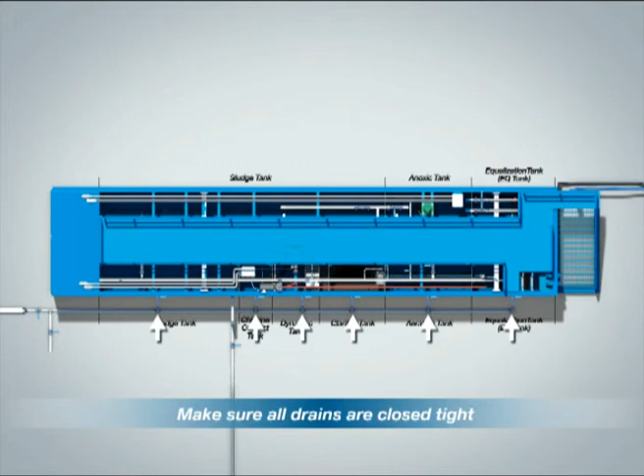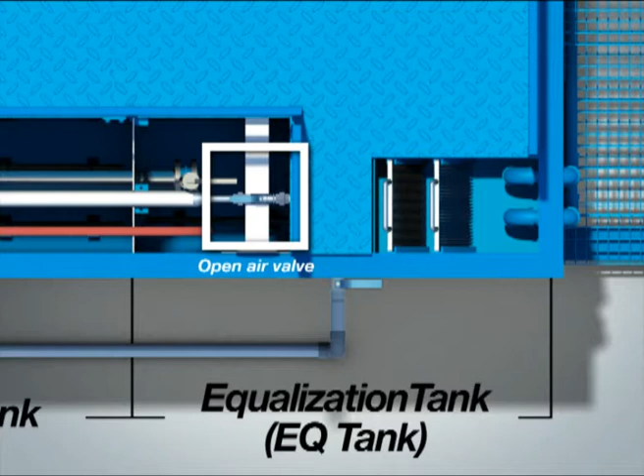Make sure all drains are closed tight. Open the EQ pump discharge valves completely. Open the air valves to the Equalization, anoxic, and aeration tanks. All other air valves should be closed.

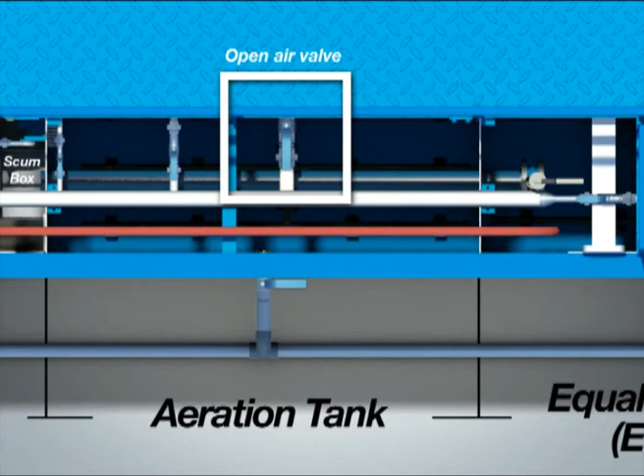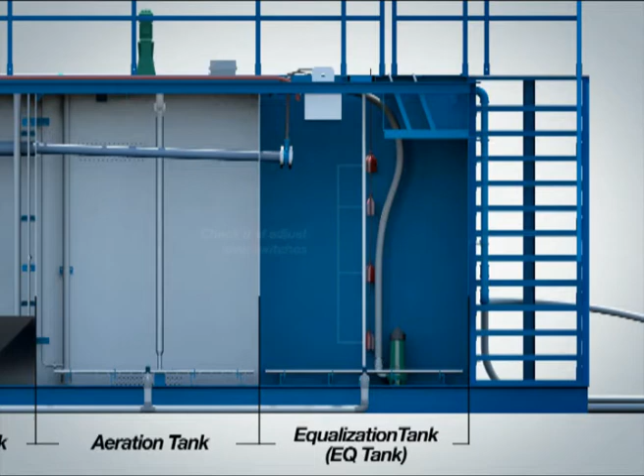Check the depth of the different float switches in the EQ tank and adjust their depth as needed. Start filling the EQ tank with raw water. Set the EQ pumps on auto once the EQ tank is half full.

Check the operation of the float switches by raising them and checking the operation of the pumps with all float switches. Check the high-level alarm switch as well.

Continue to fill the rest of the system from the EQ pumps. When the anoxic and aeration tanks are half full and the lower mixing impeller is completely submerged, turn on the mixer and check for stable operation.

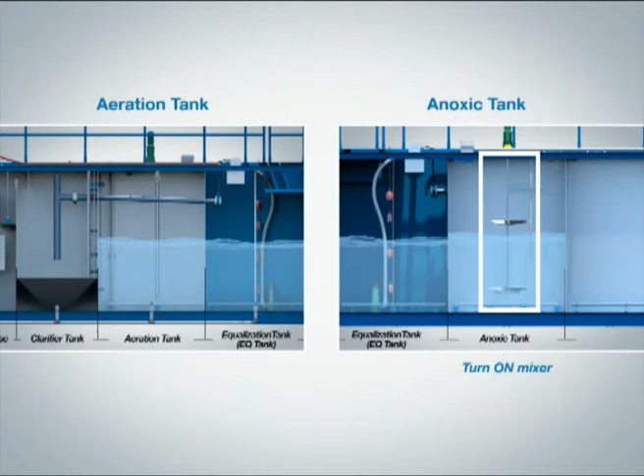Move the clean water feed hose from the EQ tank to the aeration tank with the anoxic and aeration tank no more than half filled. Continue feeding clean water into the aeration tank and make sure the biomedia is fully wetted.

With the anoxic and aeration tanks half full and air valves open, turn blower 1 on. Check for proper aeration in the EQ, anoxic, and aeration tanks. Adjust air valves as needed.

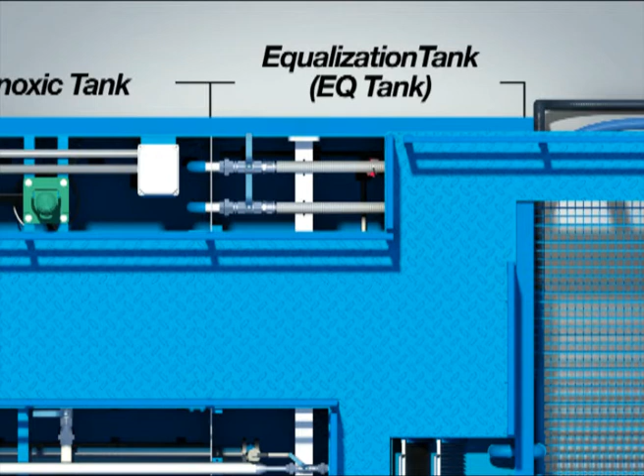Make sure the biomedia is fully mixed into the water in the aeration tank and not floating on the surface. After the biomedia is fully mixed into the water, move the clean water feed hose back to the EQ tank and close the EQ pump discharge valve so they are 1/3 open.

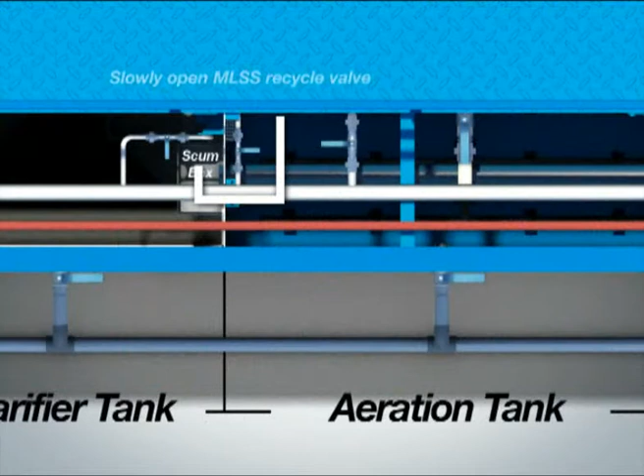Finish filling the system. Let the clarifier fill and overflow to the DynaDisc tank. Slowly open the MLSS recycle air valve and confirm flow from the aeration tank back to the anoxic tank. Leave this air valve 1/3 open.

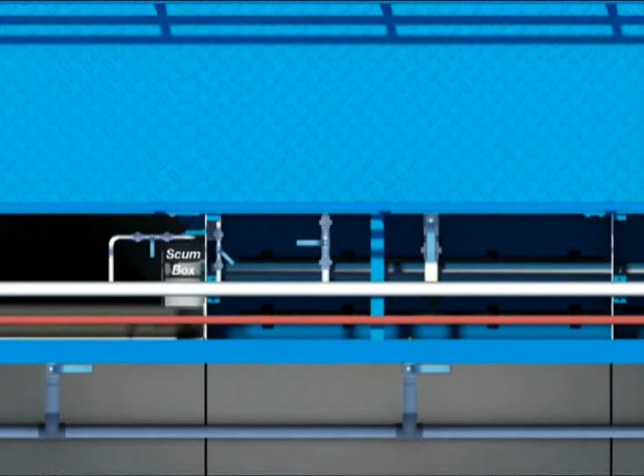Open the sludge return valve to the anoxic tank. Once the clarifier is filled with water, slowly open the clarifier airlift valve and confirm the sludge return flow to the anoxic tank. Open the sludge wasting valve to the sludge holding tank and confirm the flow.

Close the sludge wasting valve and leave the sludge return valve 100% open. Check the DynaDisc tank airlift to the sludge holding tank.

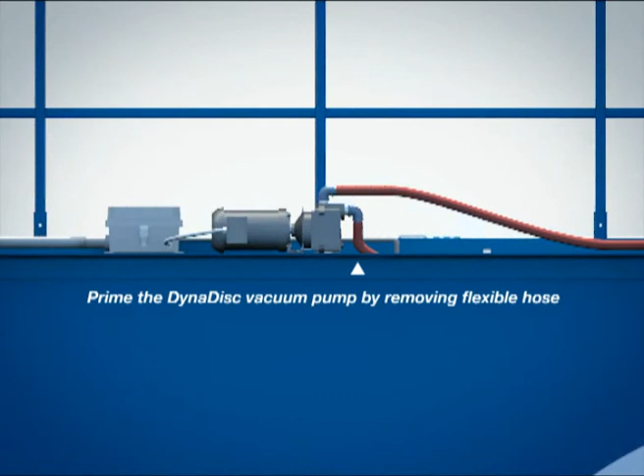Prime the DynaDisc vacuum pump manually by removing the flexible hose. After completing the priming of the vacuum pump, reconnect the hose.

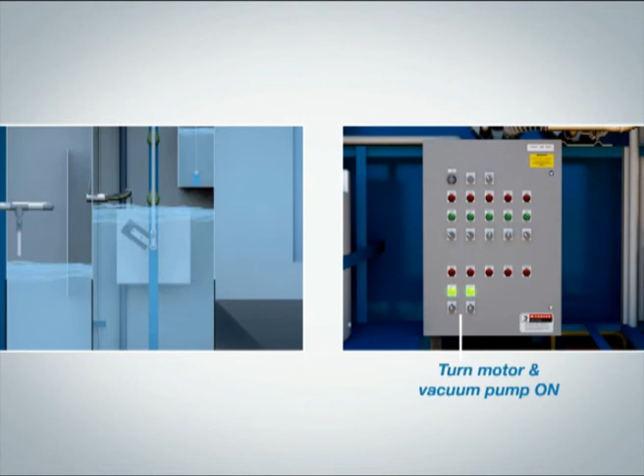When the DynaDisc filter is submerged, test the operation of the unit by turning the motor and vacuum pump on and confirm proper operation. Check the DynaDisc vacuum pump reject is recycled to the EQ tank.

Put the DynaDisc in auto and confirm the operation of the DynaDisc float switches by raising them. The lower switch should turn on the DynaDisc and the upper switch should sound the alarm.

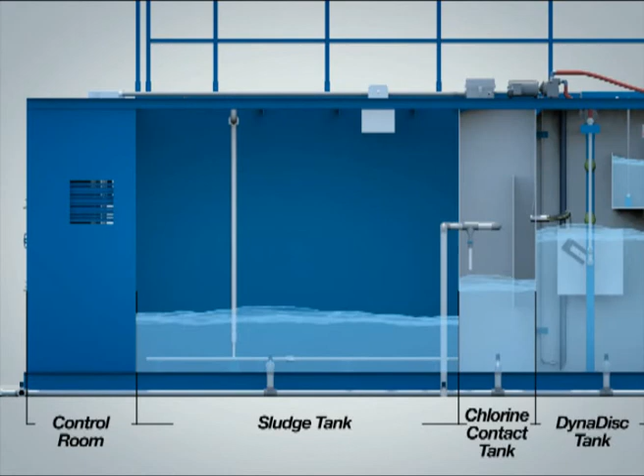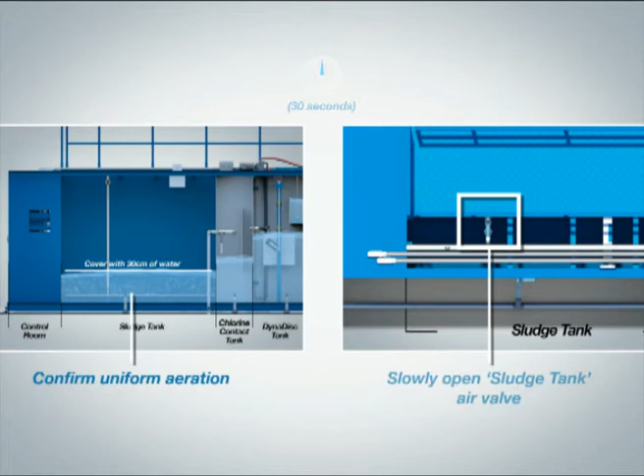Put enough water in the system so the aeration piping in the sludge tank is covered by 0.3 meters of water. Slowly open the sludge tank air valve and confirm uniform aeration. After 30 seconds, shut the sludge tank air valve.

Fill the chemical dosing tanks with water and check the dosing pumps as well as the alum and hypochlorite feeding points to test the operation of the dosing system. Confirm all tank levels are proper.

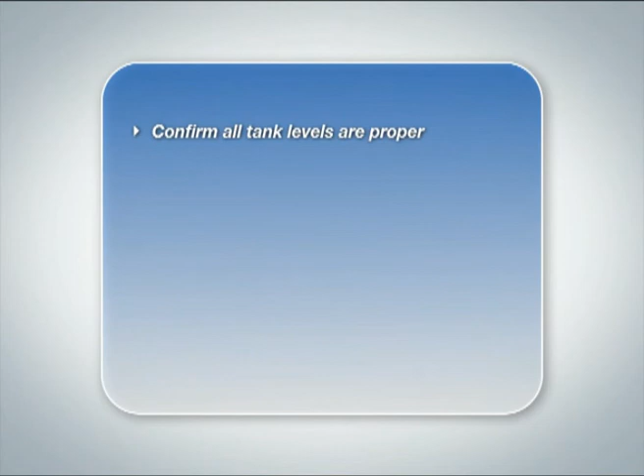Set air valves so the aeration is in the EQ and aeration tank only. Confirm that the MLSS and clarifier recycles are operating with both air valves approximately 1/3 open.

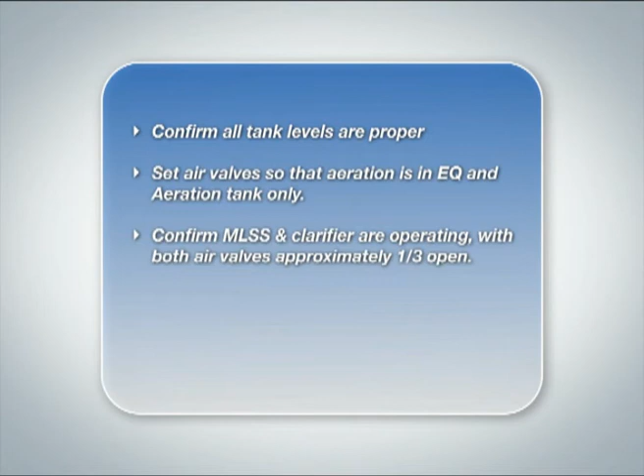The MBBR tank is now ready for wastewater. Up to this time, no wastewater has been introduced to the MBBR tank.

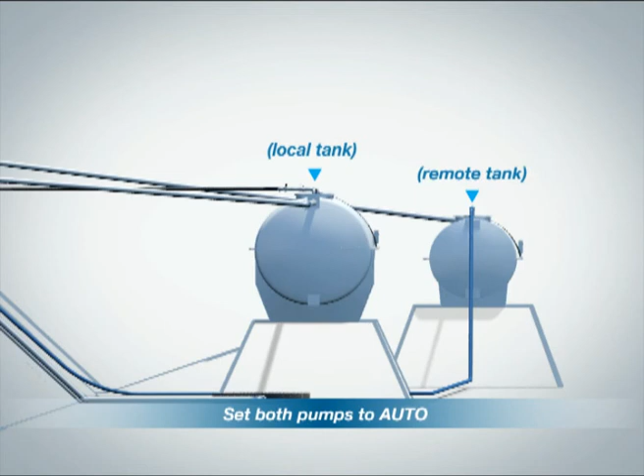Open the sump pump discharge valves 50% on both the local and remote sumps and put both pumps on auto. When the sumps activate the float switches, the sump pumps will now send wastewater to the MBBR tank.

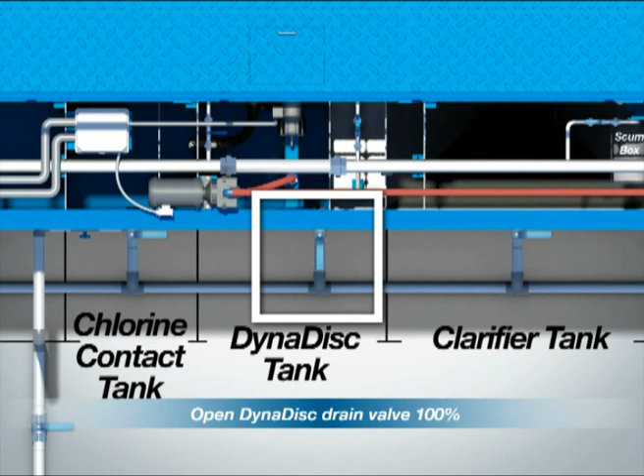Confirm that both EQ pump discharge valves are 1/3 to 1/4 open. Open the DynaDisc drain valve 100%. The startup is now complete.